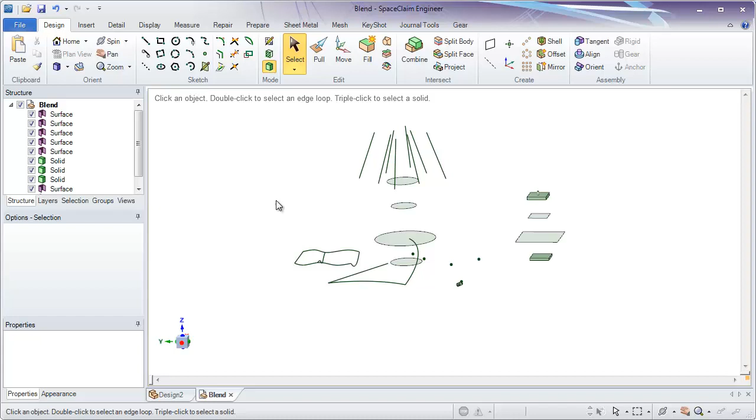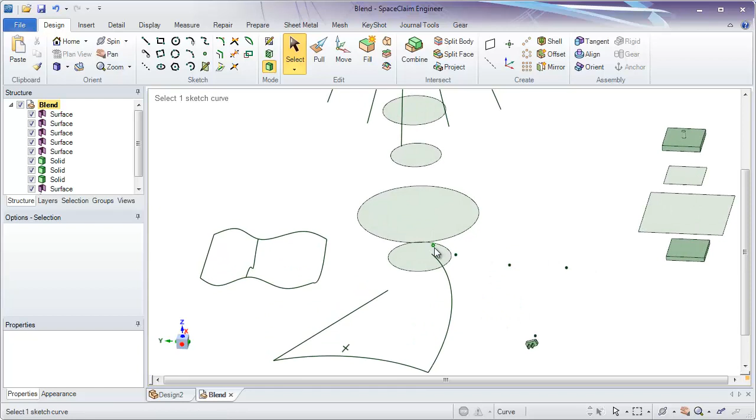In this section, we'll blend between points, curves, surfaces, and faces. Let's open up the blend.scdoc file found with the video download. You'll notice a number of types of geometry in this model: a set of points we want to create a curve through, a set of curves we want to create a surface through, and a set of surfaces and solids we want to create a solid between. We'll explore how to use the blend tool found in the edit group to create new geometry using the existing geometry. Think of blending as adding geometry through a set of points, curves, or surfaces.

First, click the blend tool, and the first tool guide and status message instructs you to select faces, curves, edges, or points to blend between. It's important to pick them in order.

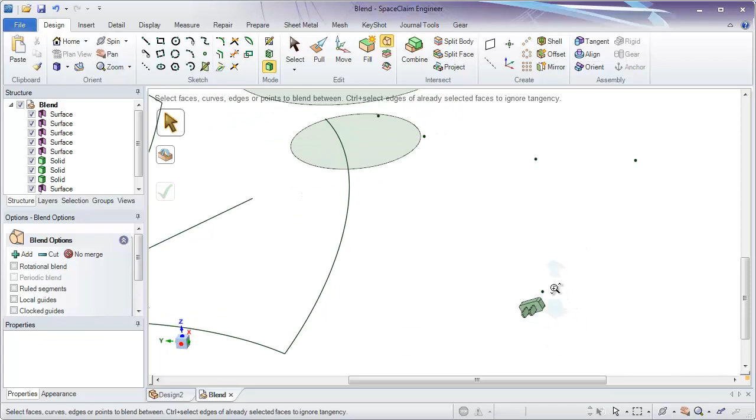First, we'll create a curve through a set of points. After clicking the first point, holding Control and selecting the next, you'll see a preview of what the curve is going to look like through the selected points. It's important to select the points in order. To complete this blend, click the check mark on the left.

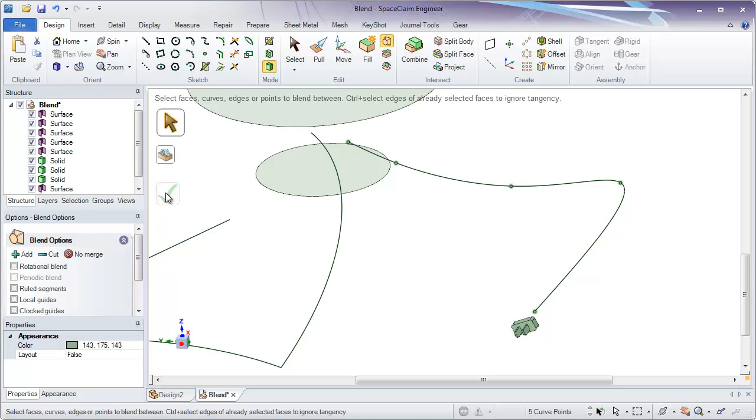Next, we might want to blend through a set of curves. Select the curves in order, holding Control, and we'll see the surface being previewed that will be blended from one curve to the other. Now, we may want to guide the way the blend is created using this curve down here, referred to as a guide curve.

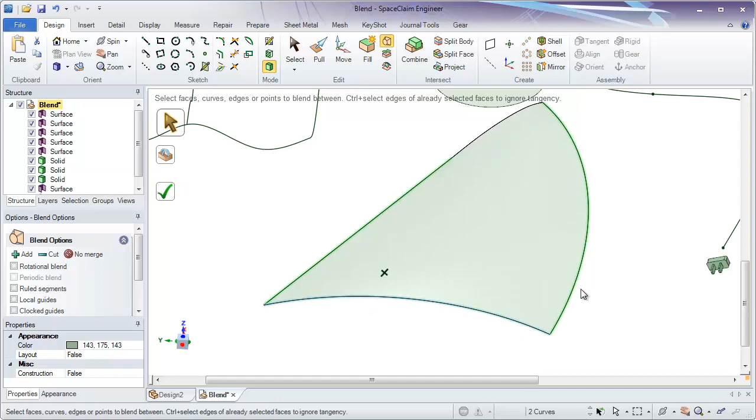One way to do this is by clicking on the Select Guides tool guide and then selecting this guide curve. Notice its color is blue instead of the highlighting or actual color of the curve. Now notice that the blend is being guided from the first curve to the second using this third guide curve. We could either click the check mark or click Enter on your keyboard.

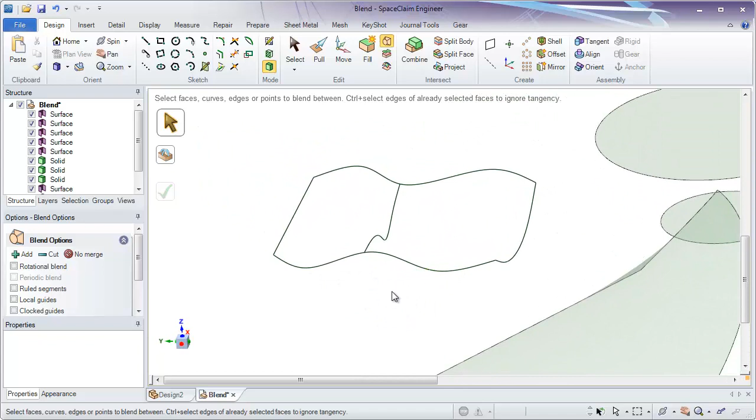Now we may want to use multiple guide curves, and you may also want to use a keyboard shortcut. If I want to blend between these two splines, one thing that's important is that I don't click on the knot defining the spline, but the actual spline itself, holding Control to click the other curve.

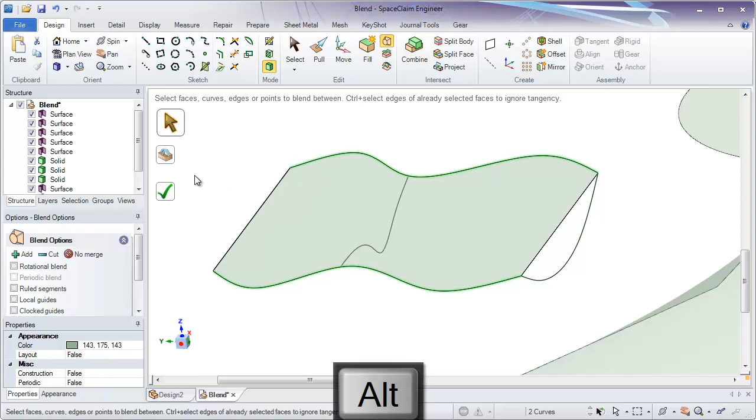Now I may want to guide it, so the keyboard shortcut is to hold down the Alt key, which you'll notice toggles on the guide curves tool guide. And then I can go ahead and click on this guide curve.

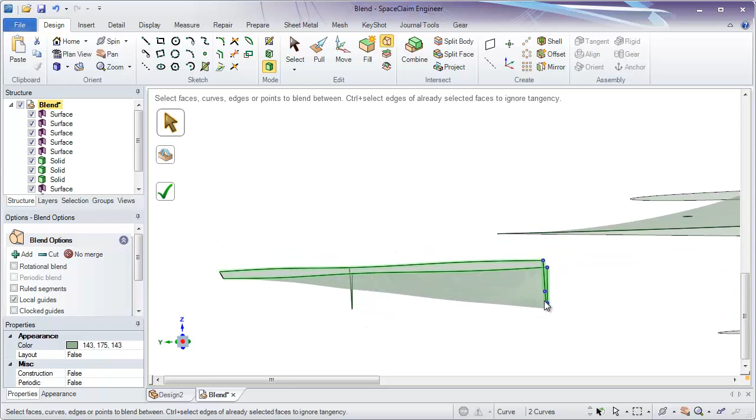Now I may only want to use one guide curve, but I may want it to only be applied locally. You'll notice in the blend options panel on the left, there is a local guides option. Now instead of applying that guide globally, it's only applying it locally, and it's still giving a straight connection on the left and this guided connection on the right. Turning that option back off will apply that guide curve globally.

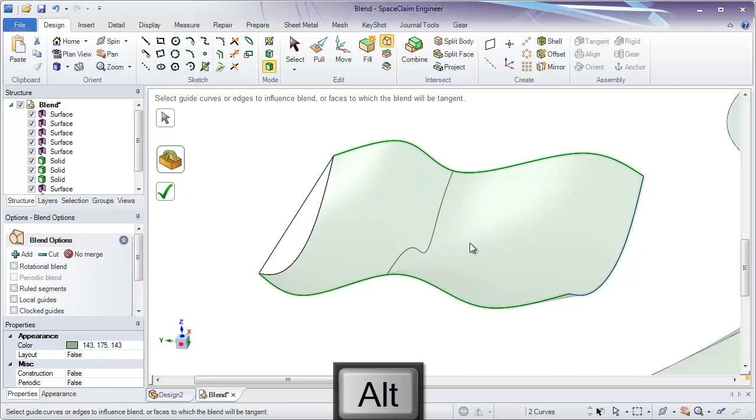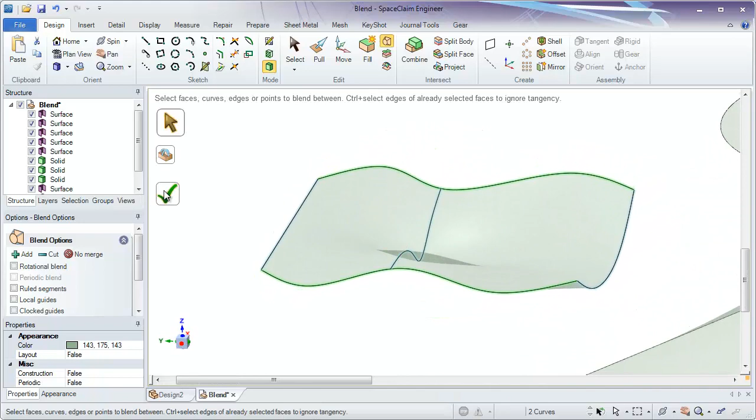But we may want to use a second guide curve. Now, if I use the keyboard method of holding down the Alt key, or click on this tool guide, and I just click on this second guide curve, the first one becomes deselected. In order to select multiple ones while holding Alt, or with this tool guide on, you also need to hold down the Control key, and then you can select multiple guide curves. Again, we can click the check mark or press Enter to complete that blend.

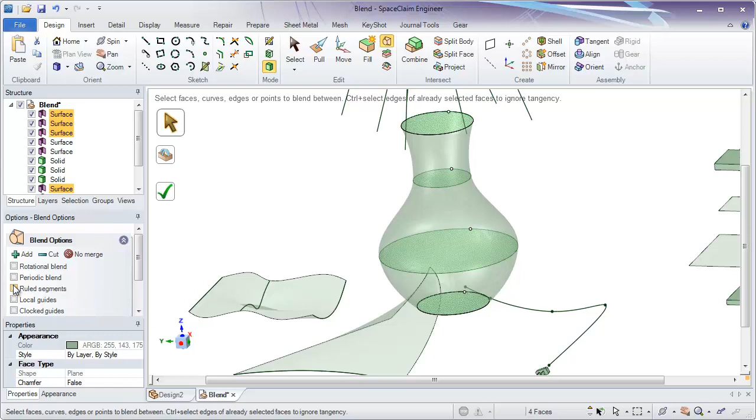We can also create solids between surfaces by selecting the surfaces in order while holding down the Control key. With multiple surfaces to blend between, multiple cross sections, we default to a tangency guide between each of the cross sections. But you may want a straight connection between each profile or cross section, so there's an option in the blend options for ruled segments. Instead of following tangency between them, you can have straight ruled segments instead.

We can click the check mark to see what that looks like, or we could always undo, turn that back off, and use the default tangency blend.

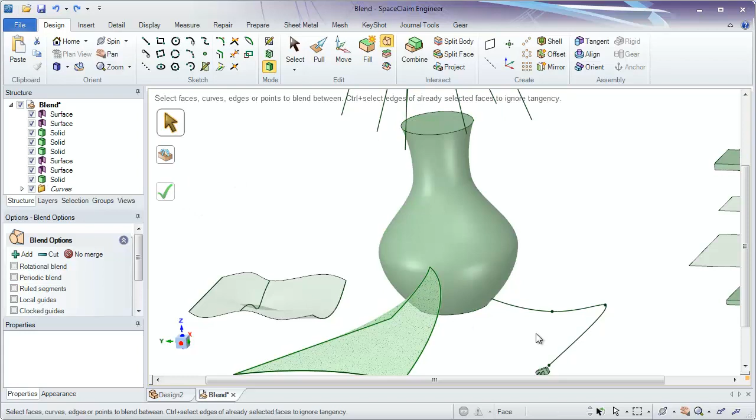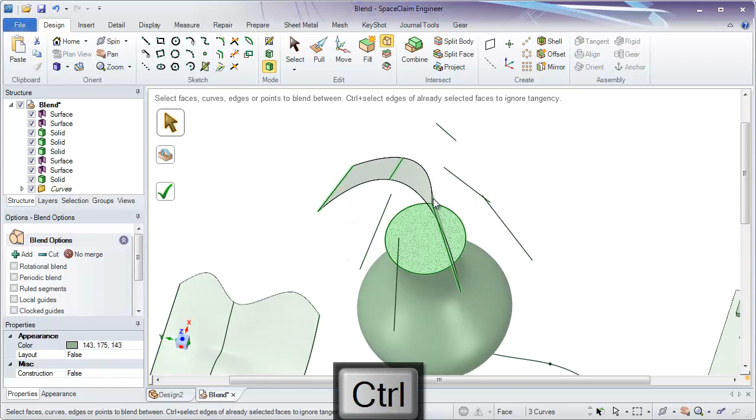A couple other options are provided with the blend functionality. Here we have a set of curves going around, and we may want to do a complete periodic blend. It's important to select them in order, and notice that if you select them in an order where the blend will cross over itself, the preview will disappear, meaning it will no longer get created. You could start over by clicking in whitespace, or simply deselect the last one and select other guide curves.

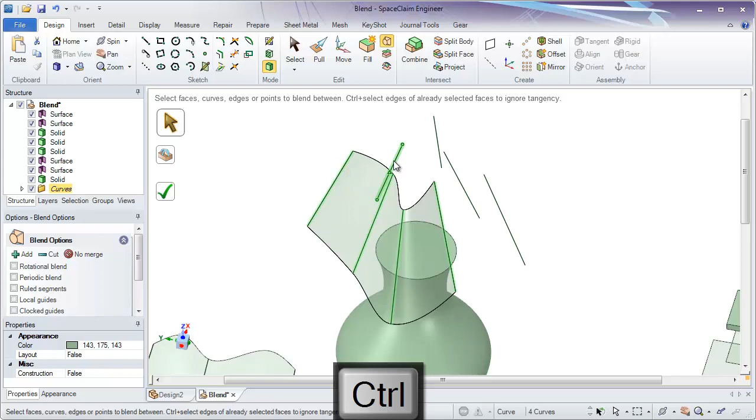If I want to restart this process because I chose too many of the wrong ones, I could just click in whitespace and now select these guide curves, or select these curves in order. Now I can always click the check mark to complete that, but I probably want to connect up the end here.

So I'm going to undo, and a great thing about undoing is it brings you right into the last step of the tool. If I try to select the first one as the last one, it just becomes deselected. It does not complete the blend. But it's very easy to do.

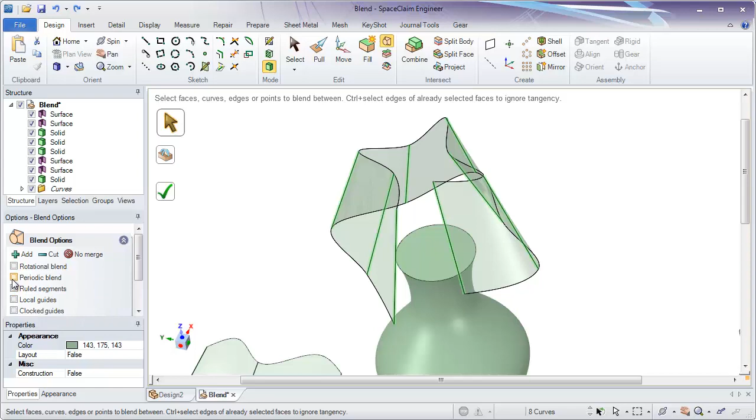You just click on the periodic blend option on the left, and that will connect the first and the last curve or points, or even surfaces or faces, depending on what you're using to create the blend.

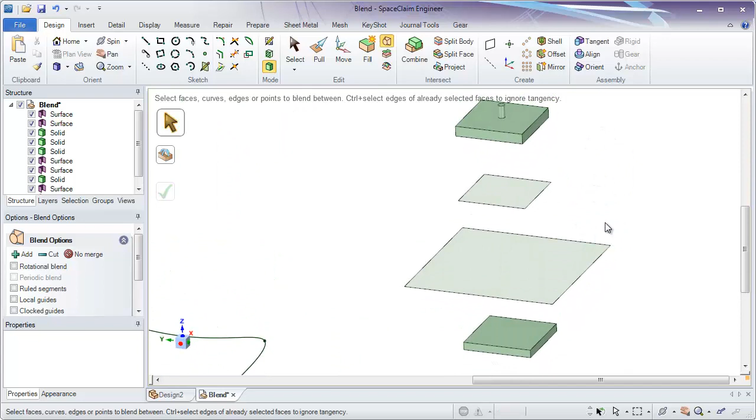It's also possible to work with existing solids and surfaces. The process is pretty much the same, selecting each one in order. Right now, because our existing solids are not in components, if I complete this blend, it will create one single solid, which may be the goal I have.

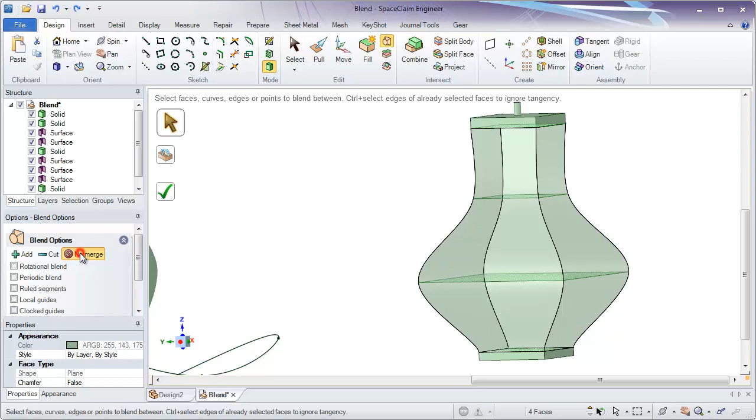But I'm going to undo because perhaps we want this to be a new solid and not merged into the original two. So I could click on the No Merge option, and now it'll create a brand new solid between the other two. Here I could change the color just to prove that we have different solids.

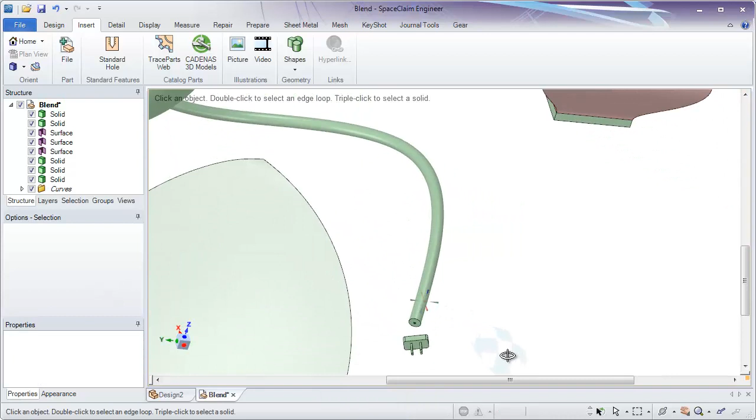One thing we see frequently is using points to create a spline and using that spline to create cabling or tubing. The way to do this is you select that spline after it's created, go to the Insert tab, and turn on the cylinder tool found in the Shapes group. This will snap a cylinder to that curve, and I could type in a value of, say, 1 to specify the radius. Now we've added the cable, wire, or tubing along that spline.

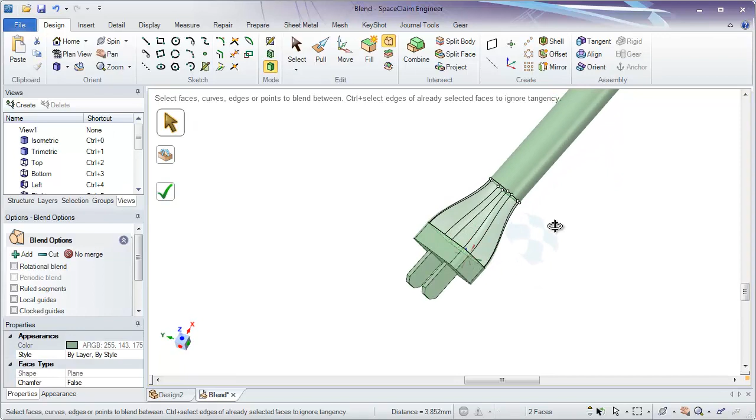The last thing we might want to do is create a blend between different shapes. If I turn on the blend tool and select these faces that are different shapes, SpaceClaim will add points on the profile that has a different number of nodes, and you can drag these around to adjust how the blend will be created between these different shapes.